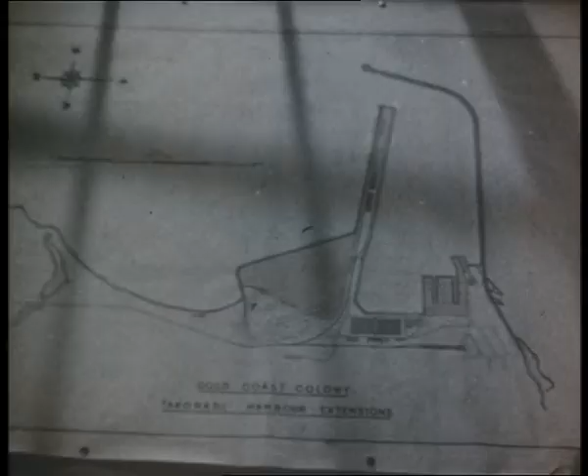Yes, we were sent to do the job. And this was what we had to do. We had to construct a new timber depot, extend the main wharf by 1,400 feet, transfer the bauxite loading berth to the outer side of the lee breakwater, level Cox's Fort Hill, and win over 49 acres of valuable land from the sea on which to construct railway marshalling yards and cargo platforms.

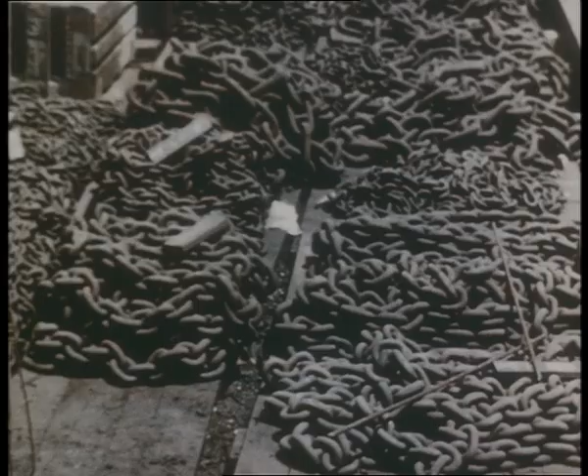For this undertaking, every item which we were likely to need had to be on hand. Materials and spare parts of every description had to be shipped and stored. For, with the exception of sand, stone, and timber, everything had to be imported.

But above all else, the modern contractor can't exist without plant, and a vast and imposing array of machines was shipped into Takoradi. Transport came high on the list of essentials.

Light vans and cars for supervisory and maintenance work. Euclids and more Euclids, that Hercules of civil engineering, each capable of carrying over 15 tons of rock and muck, and lorries by the score, a never-ending fetching and carrying, which is part of any construction job.

Even the tug, Taylor Woodrow, was brought from the United Kingdom. Now, the scene is set, and our job is beginning.

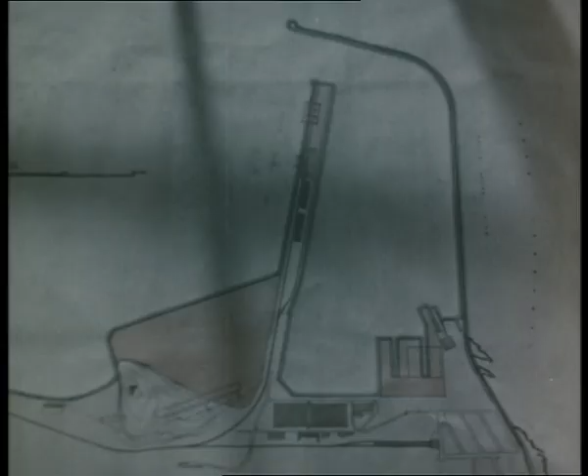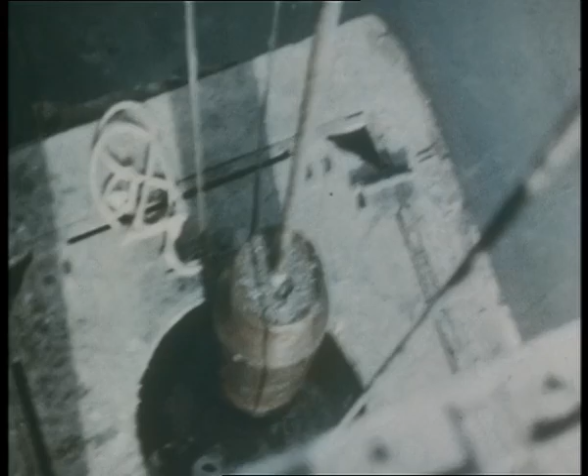On the south side of the timber depot, we are constructing the foundations for the mass concrete wall. The rock breaker Druid is seen here, leveling the seabed. The heavy steel chisel is hoisted up and dropped, breaking up the rock surface. Now the grabs go to work, removing the rubble and silt.

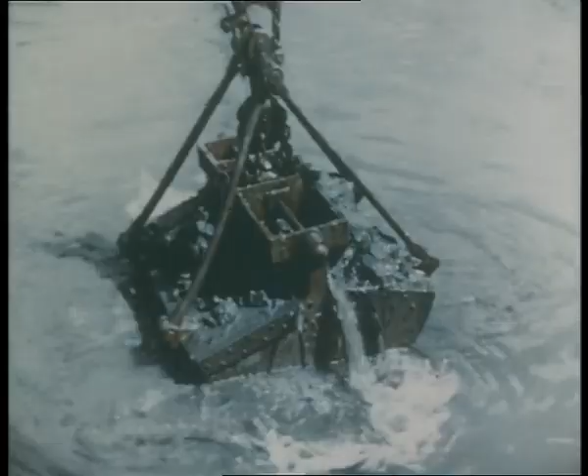Steel shutters are placed in position. To facilitate the work of the divers, we use a steel trestle. This rests on the bottom, with its top projecting above water level. An army-type gas mask is the only equipment of skin divers. They can stay underwater for a considerable time at depths not exceeding 20 feet.

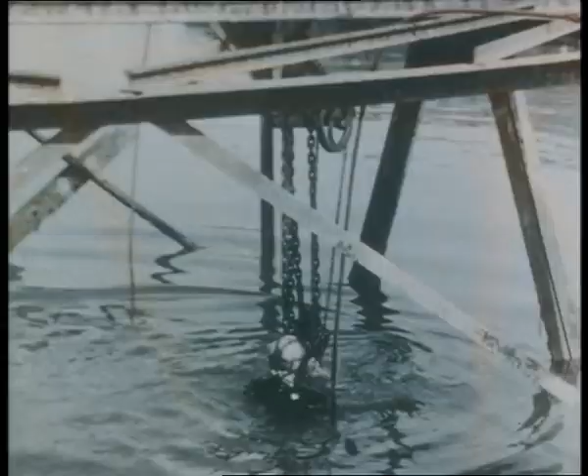We establish the exact alignment for the wall, and the divers adjust the shutters by means of chain blocks and tackle attached to the trestle.

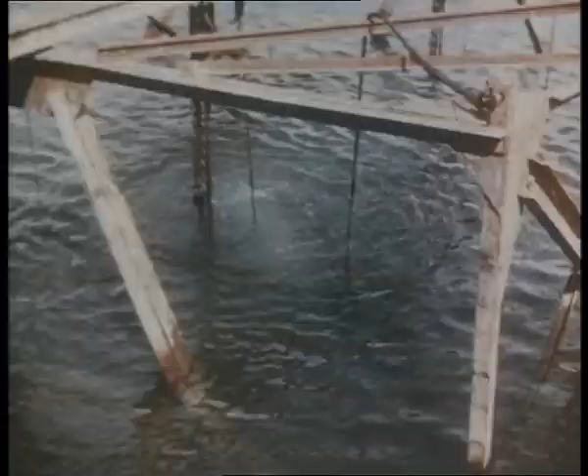Concreting barges shipped from England and assembled on the site now go into action. Two barges are used, each carrying a 3-ton crane, as well as two concrete mixers fed by swing weigh batchers. Also on board is a diesel-driven generator for night work. The barge carries a full day's supply of aggregate, sand, cement, and fresh water for the concrete.

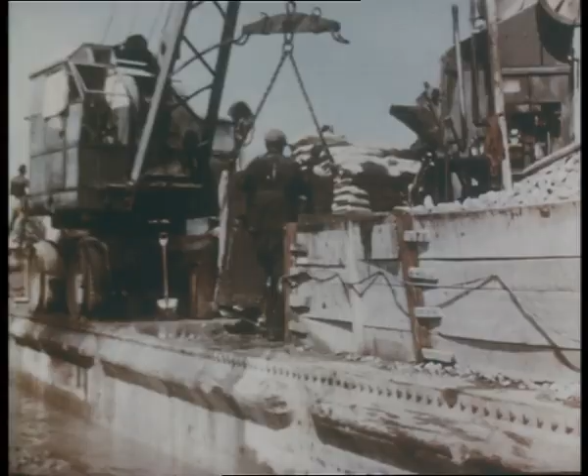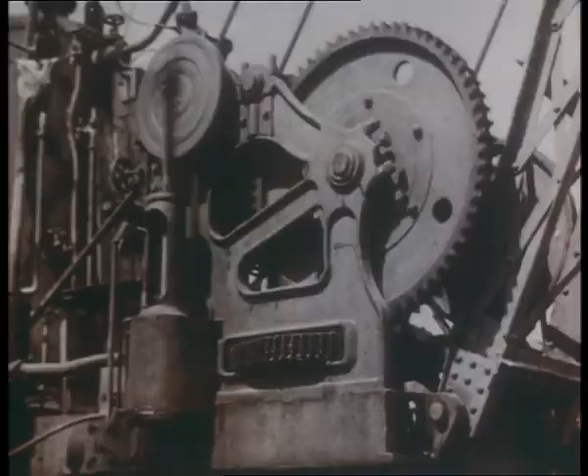Shutters are stripped after 12 hours, and the divers remove the bolts and pry the shutters loose. Another barge fitted with a 7-ton crane removes them, and they are then cleaned and reassembled on the deck for the next job.

We have just seen what we call the extrusion method of construction. For this, we use a 3-sided shutter constructed by us in Takoradi. We work forward from the wall previously built, putting the shutter down, filling it with concrete, then removing it and using it over and over again. Thus, the wall progresses ahead with no intermediate spaces.

Extrusion method is used at the south side of the timber depot, where the walls are somewhat wider in section, owing to the greater depth of foundation.

Before that, we were using the pier and panel method. Separate piers or blocks were built at 30-foot intervals. Then long steel shutters fixed to the front and the back of them, and the space filled with concrete. 4,000 linear feet of quay wall will have to be built by both these methods when the new timber depot is completed.

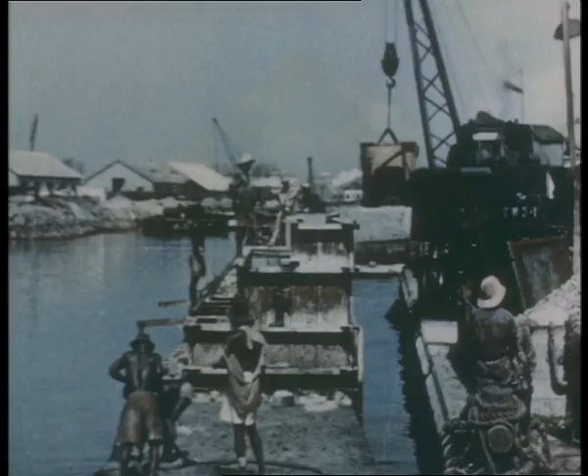The underwater concrete gradually grows into one solid wall, just exposed at low tide. Then the top concrete is laid. This operation is very much the same. Steel shutters are fixed and filled from the concreting barges. This section of the wall is 8 feet high, 5 feet showing above high tide level.

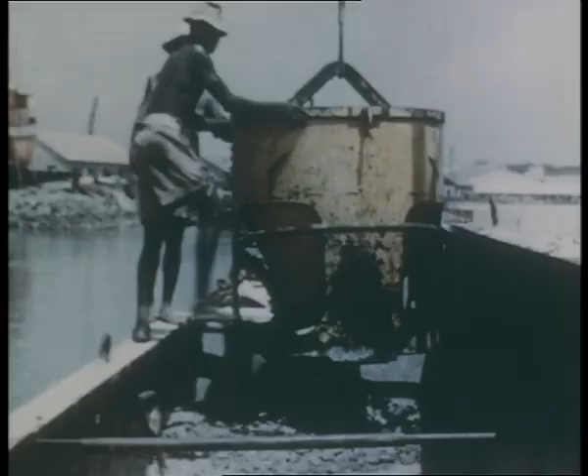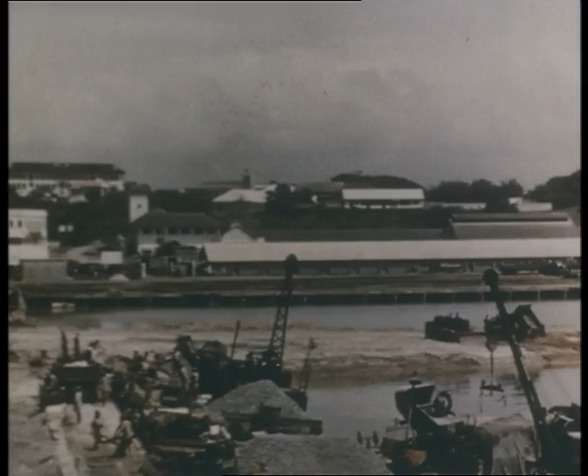As the new timber depot begins to take shape, the next step is to fill the area enclosed by the wall. Sand used for this purpose we obtain from the beaches at the mouth of the Whin River, a mile or so from Takoradi.

The Whin River sand is not suitable for concrete because of the high shell content, but forms a good filling material. It is excavated by dragline excavators and transported to the harbour area in tipping lorries.

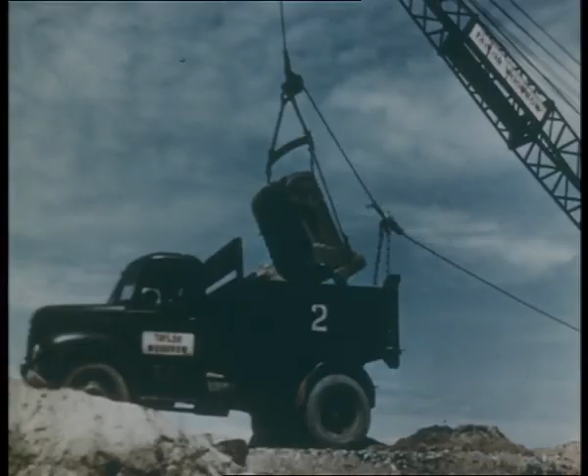On the way, the lorries pass a bit of old Africa, where time and human labor are perhaps of less importance. Maybe their job has not the urgency of ours.

We are using a fleet of lorries continuously on this work, for some 300,000 cubic yards of sand have to be deposited behind the walls to form the timber depot quays.

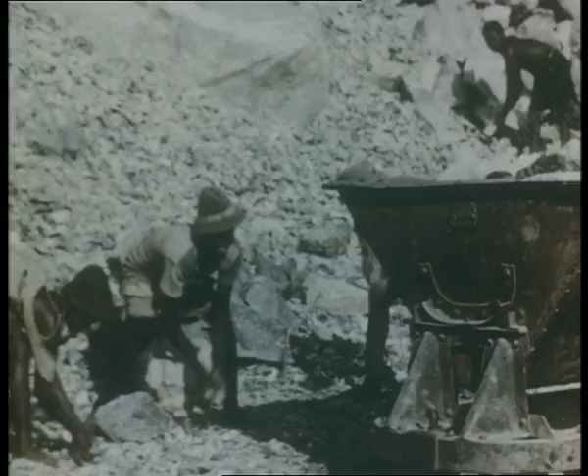These are loaded into narrow-gauge wagons, which are drawn by diesel locomotives to the crushing plant situated within the quarry area.

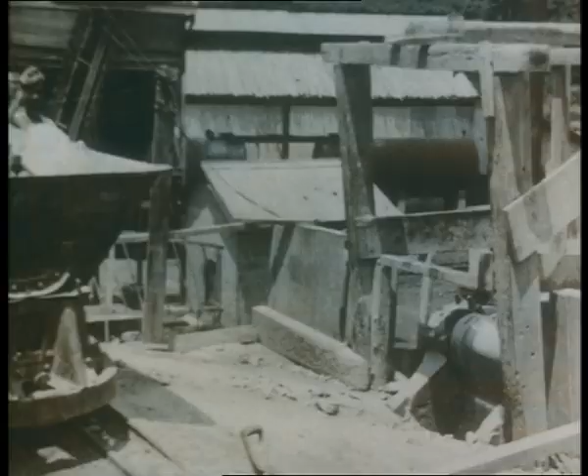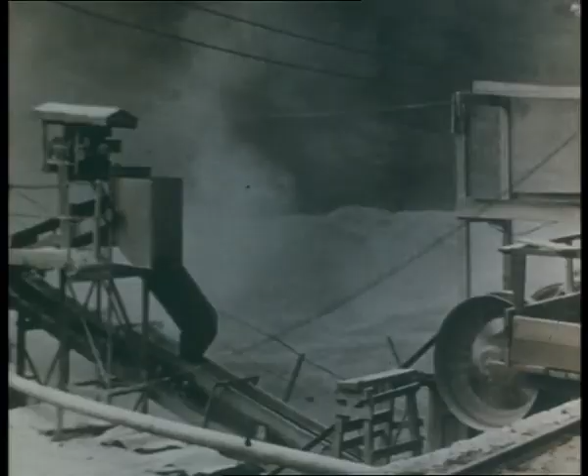The plant crushes the stone, which is then screened to the desired size. Then it is automatically loaded into railway wagons for transport to the harbour area.

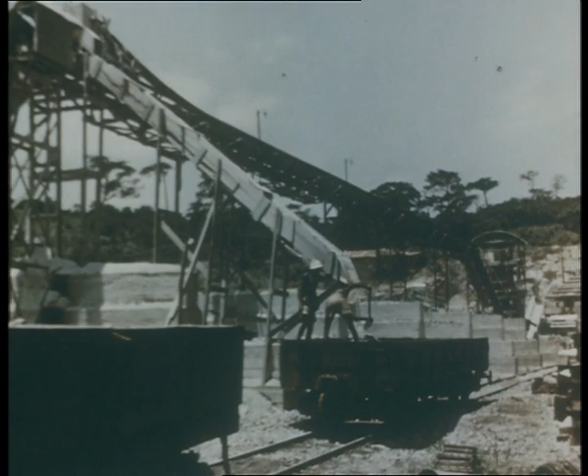Pneumatic drills are at work again. Fresh charges of explosive are laid in preparation for another blast.

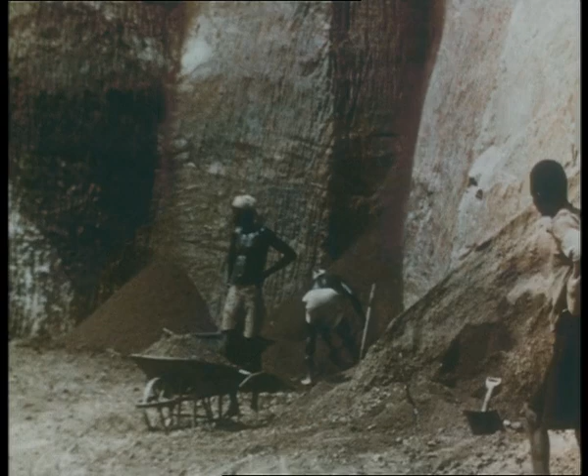As the work on the quarry face proceeds, the 30-foot overburden has to be removed to uncover fresh ground. This work is carried out by a local subcontractor, and it is done entirely by hand.

Now for our biggest and most spectacular undertaking, the removal of Cox's Fort Hill. This local landmark, some 80 feet high and covering an area of about 24 acres, consists mainly of shale and laterite. The ground has first to be broken up to make it workable.

Excavation has already started, and only the use of the most modern equipment and transport will enable us to finish the job in the limited time at our disposal.

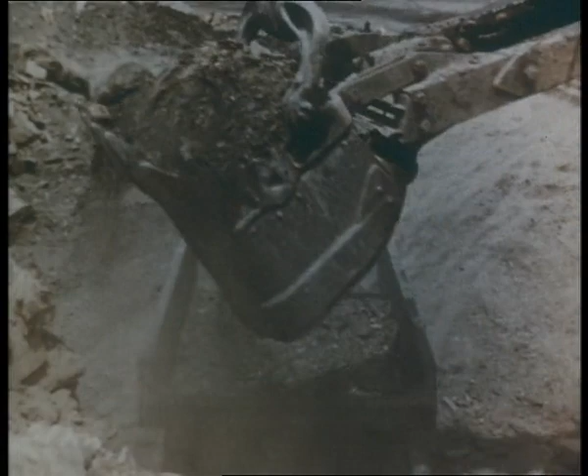Two and a half cubic yard Bucyrus Erie diesel-driven shovels are the tools for this job. The excavated material is loaded into the 10 cubic yard rear dump Euclid trucks and transported to the foreshore to reclaim eventually an area of 49 acres and provide space for rail yards and other establishments.

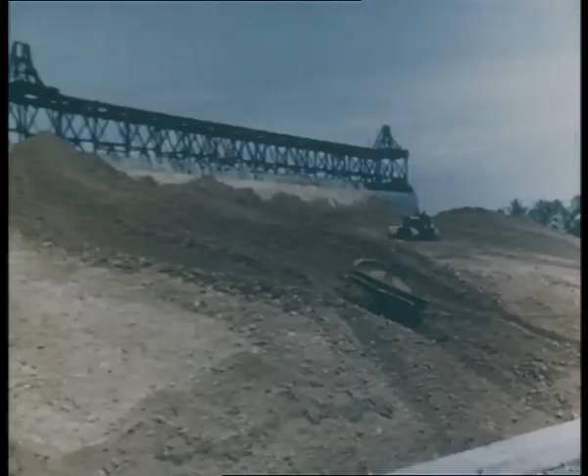When a shipment of bauxite is to be made, the ore is loaded from the heap into buckets and transported over Cox's Fort Hill to the loading berth in the harbour.

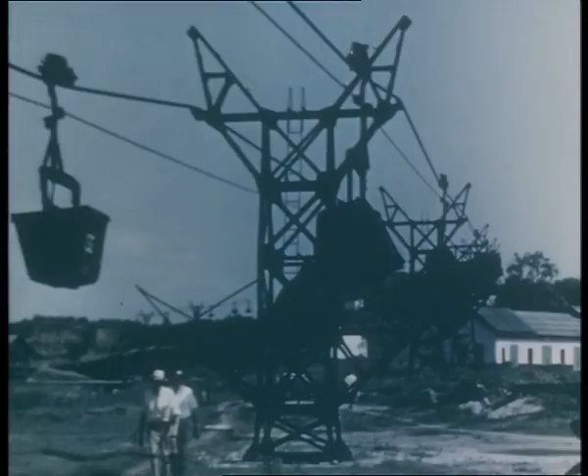The removal of the hill means that instead of the present roundabout route, the ropeway will be realigned and taken directly across the reclamation area and then along the lee breakwater to the bauxite loading berth.

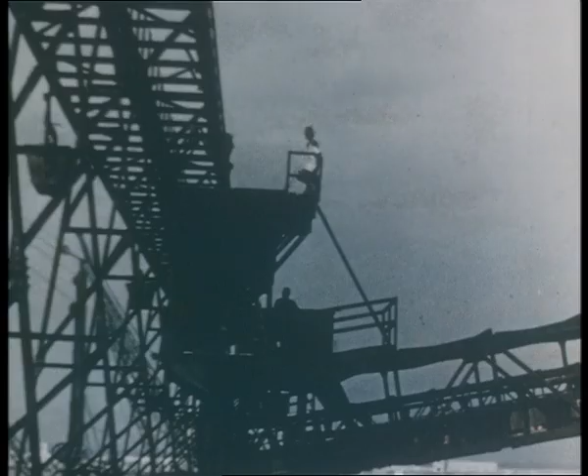This special mechanical loading apparatus is at present on the harbour side of the lee breakwater and has to be transferred to the outer side, thus allowing the new main wharf extensions to be built.

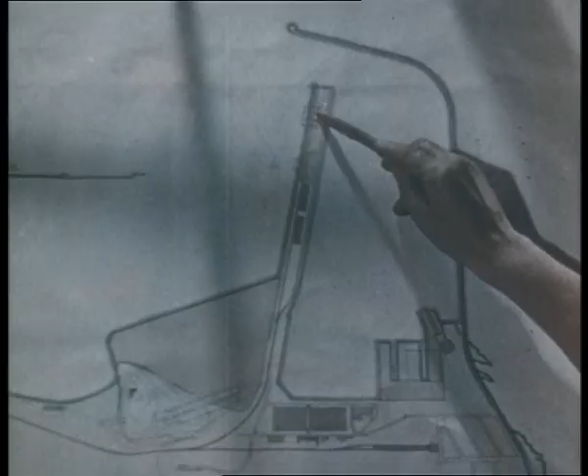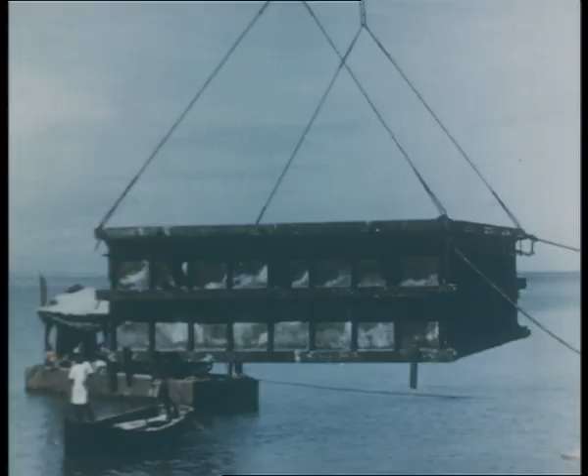Our work on the piers for the new berth is already well in hand. Here the sea is about 40 feet deep and 4 mass concrete piers have to be built to carry the heavy steel girders and transporters.

The shutters are lowered, and the divers, now working in standard dresses, go down to set them in position. Owing to the restricted working space on the lee breakwater, the concrete is mixed on the present end of the main wharf and is transported to the site by narrow gauge railway.

The main wharf is being extended by 1,400 feet and, when completed, will provide 3 extra berths for ships and also wharf space of 245 feet wide on which we are to build 2 double-story transit sheds.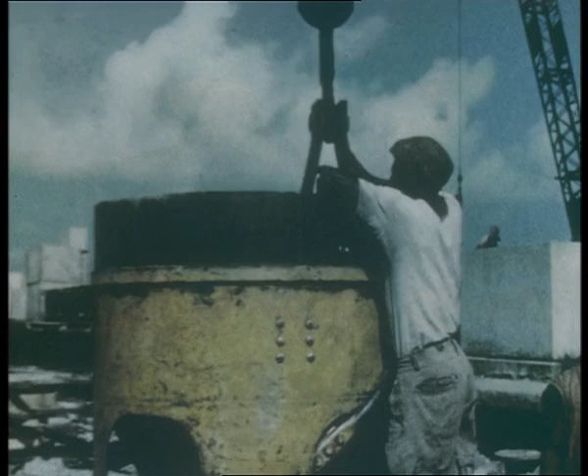The wharf wall will be built of concrete blocks, the heaviest weighing 15 tons. We are making the blocks and storing them in the block yard at the end of the present main wharf.

The lifting gear is lowered into the holes cast in the blocks where it is locked. A 15-ton crane picks up the block, swings it into position, and lowers it on the foundation already prepared underwater.

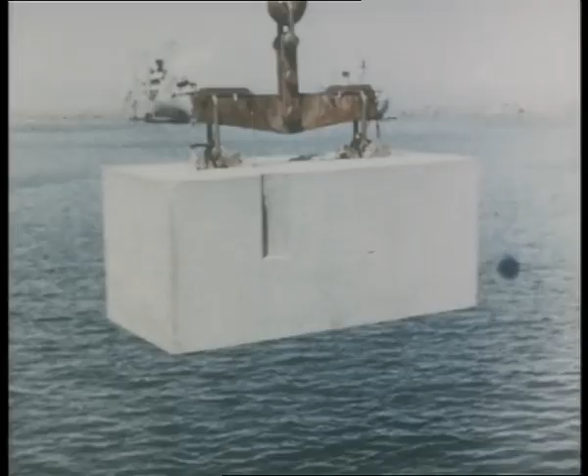This, again, is the work of our divers. Under their direction, the blocks are set in position. Great accuracy is required, and the work is carried out to a fraction of an inch.

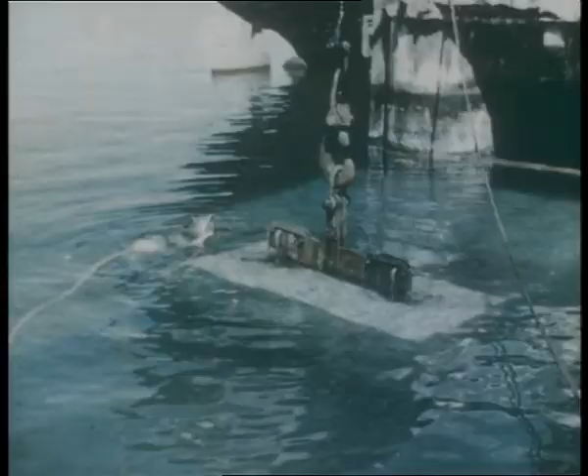A total of nearly 6,000 blocks will be set to form the wall. The greatest width of the wall at foundation level is 24 feet, and the greatest height of blockwork above the concrete foundations will be 36 feet.

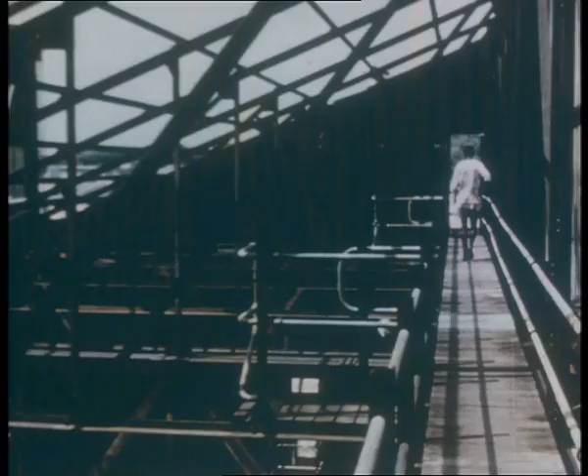The timber depot was one of the most urgent requirements, and our work on the sawn timber sheds is already nearing completion. Inside, the steelwork is almost finished. The floor is well advanced.

The exterior of the sheds is now completed, and we can begin to appreciate the tremendous volume of timber that they'll be able to hold. The railway track along the new quay wall is directly linked with the timber storage sheds, which are acknowledged to be second to none in any other part of the world.

North Log Quay railway tracks are the direct connecting link between the supply from the interior and the export by sea of numerous kinds of West African timber in the log.

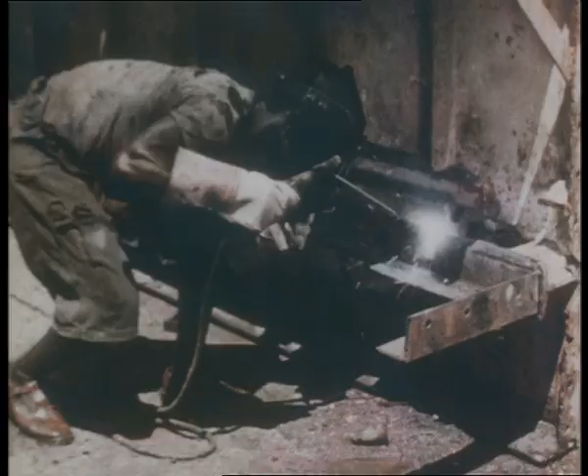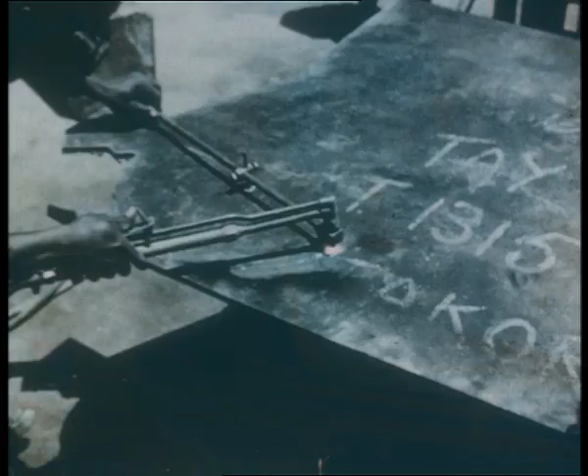The nerve center of our work is the Taylor Woodrow offices in the harbor area. Here, technical drawings are prepared, and from here, the whole intricate system of transport, supply, and labor is run.

Meanwhile, Cox's Fort Hill has almost disappeared, and the last excavations are taking place. 2 cargo platforms and a vast railway marshalling yard will soon replace the famous landmark. Barely 2 years ago, Cox's Fort Hill formed the background of this very scene.

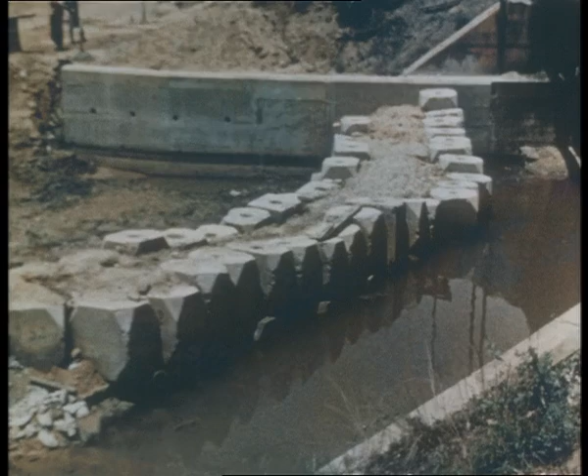Whilst work on the original contract was proceeding according to plan, other works subsequently planned for further extending railway facilities were progressing well at Butuah Lagoon.

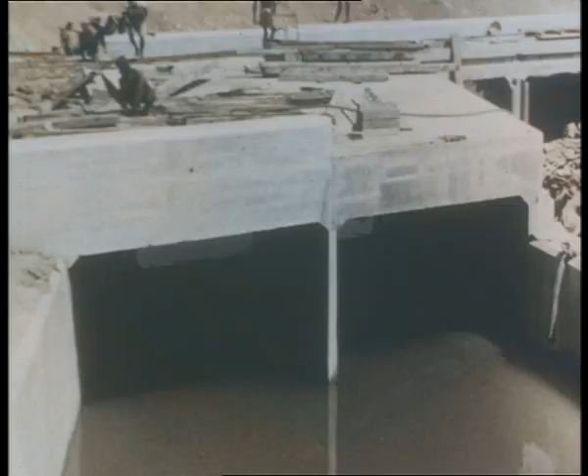A new road has to be constructed involving the building of retaining walls, and at a later stage, a new bridge has to be built to carry the road over the railway. Here, new culverts are being constructed to carry the road and railway over the Butuah Lagoon. This work is being carried out in such a way that railway traffic is not being interfered with.

Where Cox's Fort Hill once stood, cargo platforms are now gradually taking shape, and work goes on at full speed.

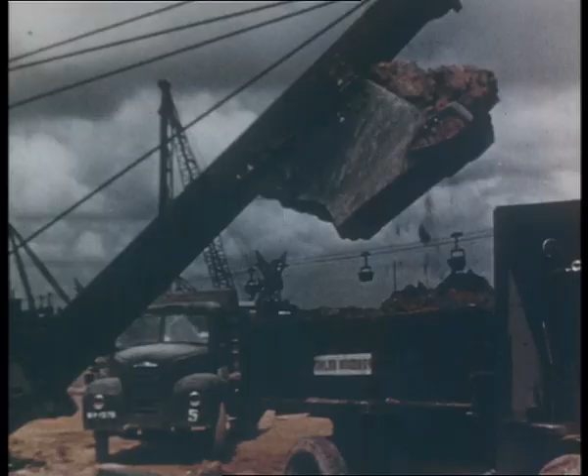Very soon, the ballast is to be put down for the railway track. Sleepers follow and are ready to be placed in position.

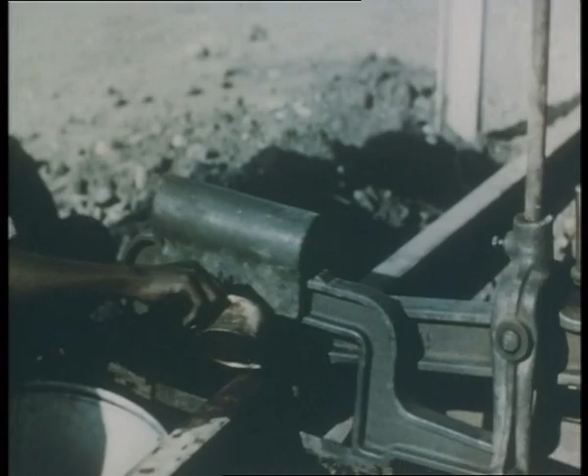Tracks are now laid. This is a skilled job in which our African staff excels. Here is one more example where men have to work as a team if a job is to be well done.

As the railway tracks are gradually completed, the platforms too become ready, and soon they are handed over to the railway authorities to start the life of activity for which they were built. They will work in conjunction with the other harbour installations to form a network capable of handling the tremendous and ever-increasing imports and exports flooding through Takoradi.

The Gold Coast is proud of its vast new marshalling yard because of what it will mean in terms of trade, and remembering that a hill once towered here, and what efforts were needed to remove it, we too feel proud.

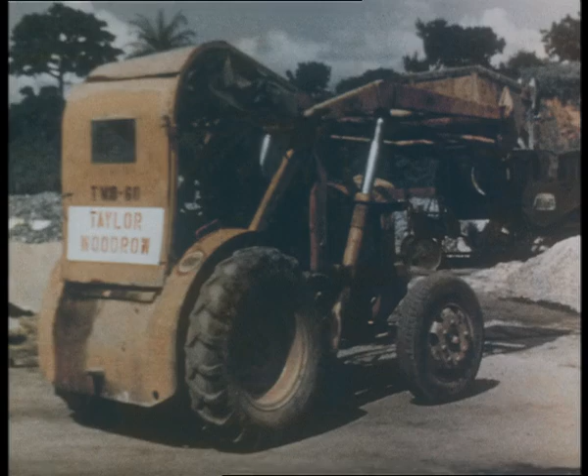Loco sheds form an important part of the railway organization. At present, the sheds are not quite finished, but in a short time, they too will be in general use.

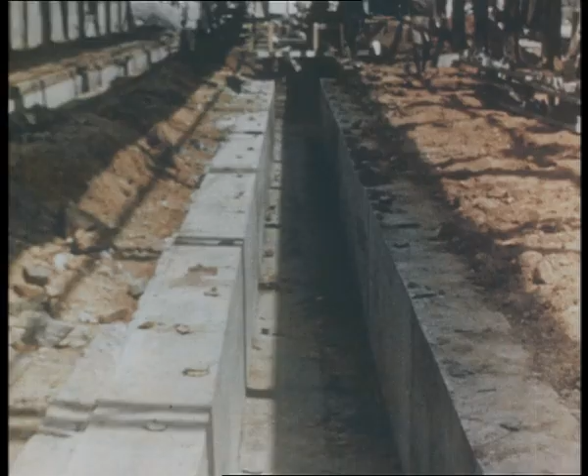All cement cargoes will be stored in this new building.

The realigned aerial ropeway leads to the new bauxite berth, where the complicated loading apparatus has been transferred to its new position on the outer side of the lee breakwater.

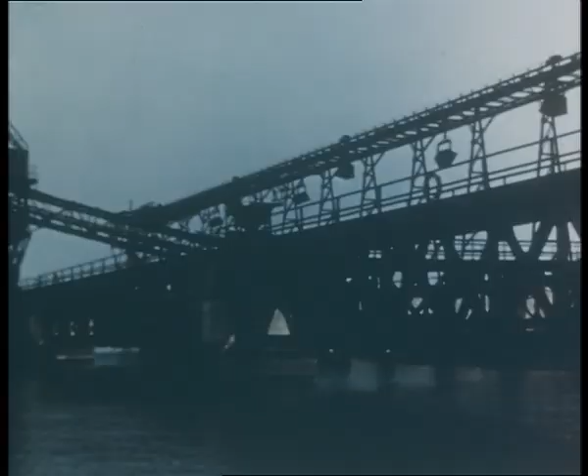As the work of extending the main wharf by 1,400 feet is progressing, and as our new block wall moves inevitably forward, the shore derrick is replaced by the massive 15-ton electric block-laying crane, which travels on the wall on specially laid trestles.

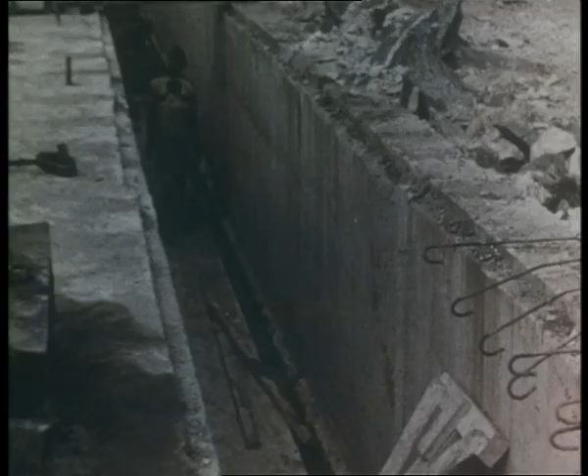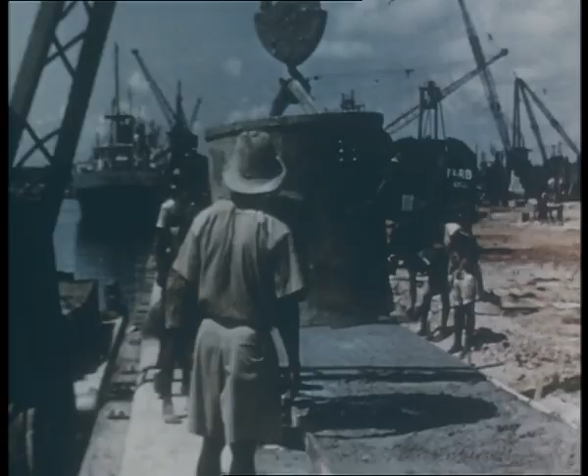A concrete subway is being constructed on top of a block wall. Here again, steel shutters are used. When completed, cables and pipes will be laid in the subway. Top concrete for the subway is carefully leveled in preparation for the laying of the coping stones.

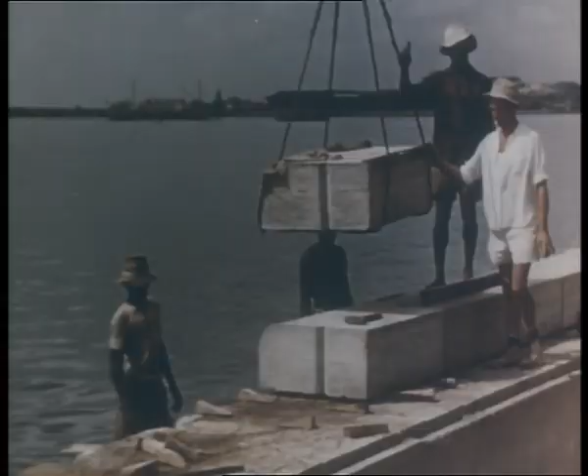The area between our new block wall and the lee breakwater is now being filled in. Once again, the Euclids are called into action, dumping thousands of tons of soil to form the new quay. Bulldozers follow, leveling the area for our next operation.

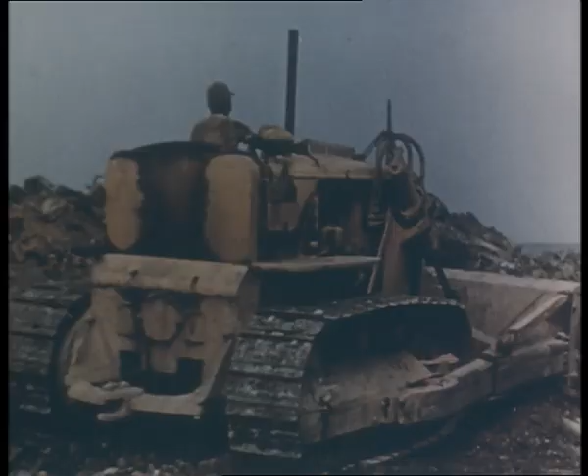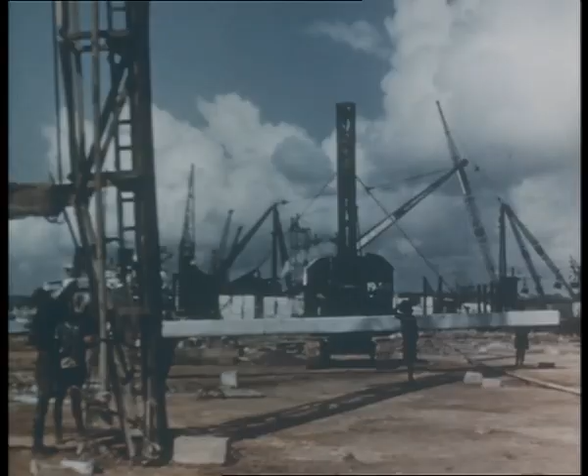Pile drivers now come into action. Reinforced concrete piles are driven deep until they reach solid ground to make a firm foundation for the transit sheds. A helmet is fitted to protect the pile head whilst driving the pile to its full depth.

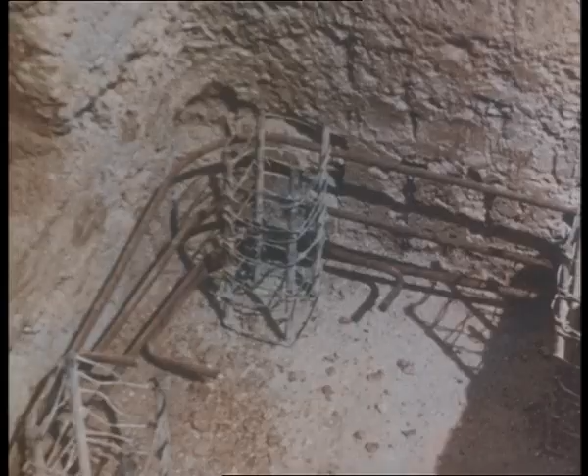The driving machine moves to its next position. Pile heads are broken out and reinforcements fixed for constructing the pile caps and beams to carry the walls of the new sheds.

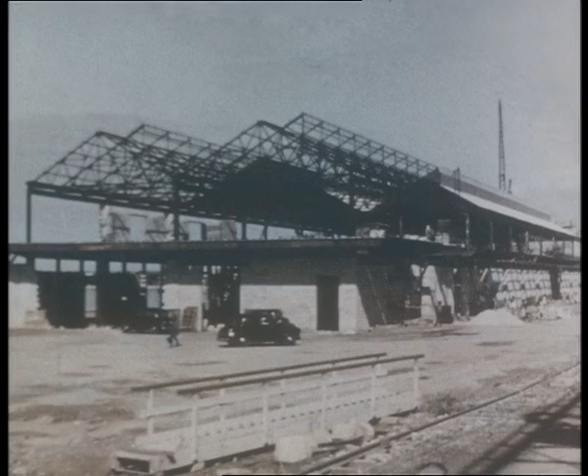Here we see the first transit shed in the final stage of construction. When completed, these sheds will enable the authorities to deal rapidly and efficiently with passenger traffic and the steady flow of merchandise through the port.

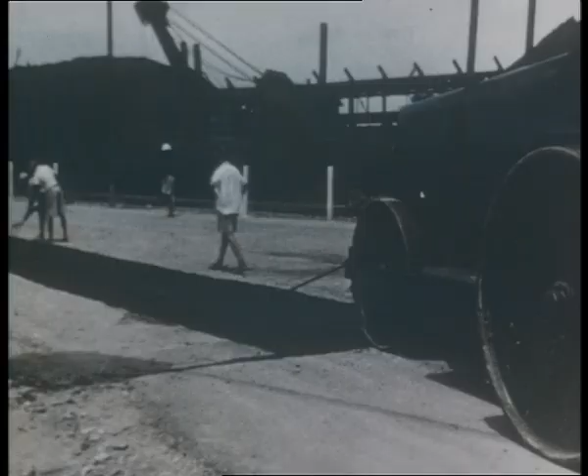Slowly but steadily, our task under the original contract draws to a close. The new block wall is finished, and the protecting timber fenders are in position.

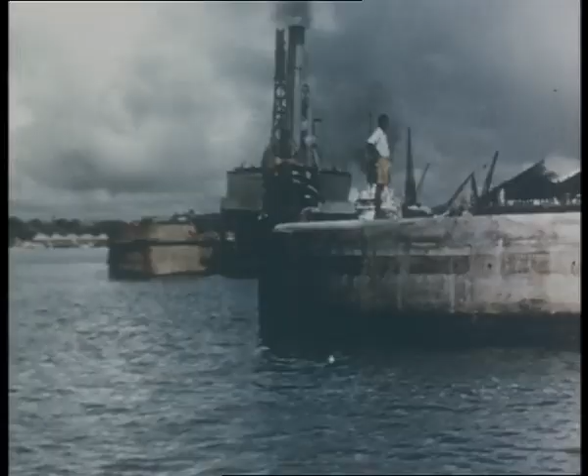We look out to sea, over the ghost of Cox's Fort Hill, to the marshalling yard, to the main wharf extension and the new timber depot. A quiet feeling of pride creeps over us all, African and European alike. Here are some of our European staff who, working in happy cooperation with the consulting engineers and the Harbour Authority, form the perfect team.

As the great day draws near for the opening ceremony, our director in charge, Mr. A.J. Hill, accompanied by his wife, flies out to join our team, African and European, who owe much for the successful completion of the job to enthusiastic and never-failing support from their colleagues, specialists and suppliers in the United Kingdom.

Soon the plane is circling over Takoradi, and as Mr. Hill looks down on the finishing touches being put to the great enterprise, his thoughts must go back over the years, remembering the setbacks, the successes, the planning, the achievements, the heartbreaks and the triumphs, all part and parcel of our industry.